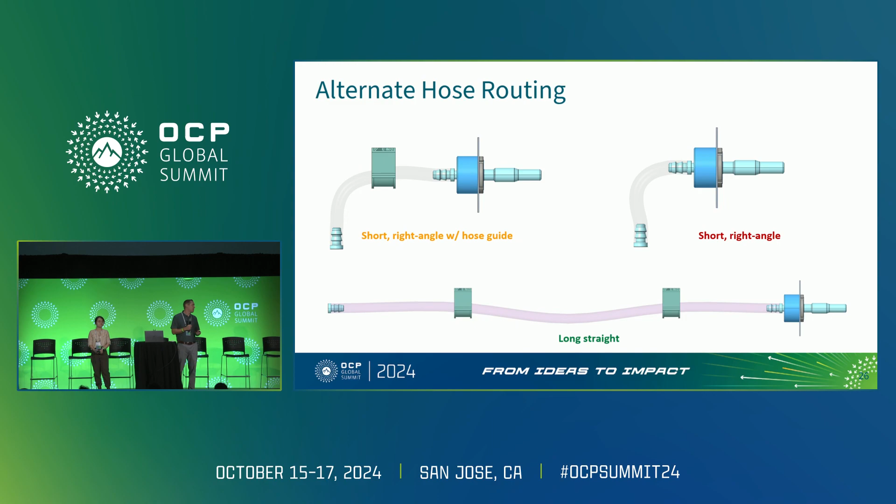And then in the top right picture, when you don't have that hose guide, you have that tight bend coming off the hose. It can put some additional forces directly onto that valve, and so that's when you get a little bit worse performance. So with all this in mind, we are still doing some further investigations on this, and we'll be providing some additional updates to the community later. But this is one of the work streams that we're pursuing currently.

The next area that we focused on is EPDM hose investigation. And really this was a piece of feedback that we received from the community, that there's a strong desire to use EPDM in some scenarios. And then there's also looking ahead at different future regulations on PFAS. I mentioned earlier, the initial specs that were released were done with PTFE convoluted tubing. So this is one of the work streams that we were also looking into.

Within the group, there's some hose manufacturers that we worked with to develop a thinner, more flexible EPDM hose with specific chemical compositions that work with the coolants with these types of systems. Another strong request from the community is that for the connection to the plugs themselves, there's a strong desire to have a push-on style connection to the barbs, which doesn't require a hose clamp, which, the clamps take up additional space and can create some sharp edges depending on the type of clamp used.

So with this, the new EPDM products that were developed through the different vendors within the group are currently undergoing additional validation testing. And this will be happening both at just the hose level and then at the combined hose and valve level. So some of those initial tests include burst tests, impulse, creep, HALT, and permeation.

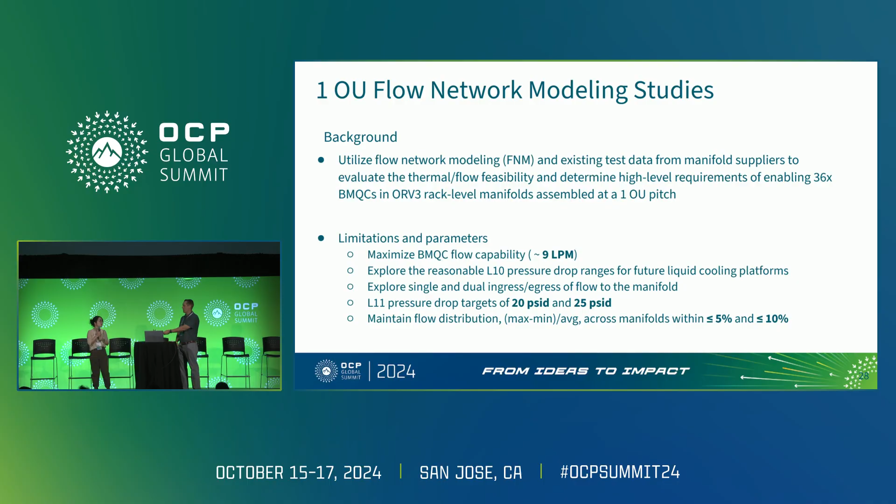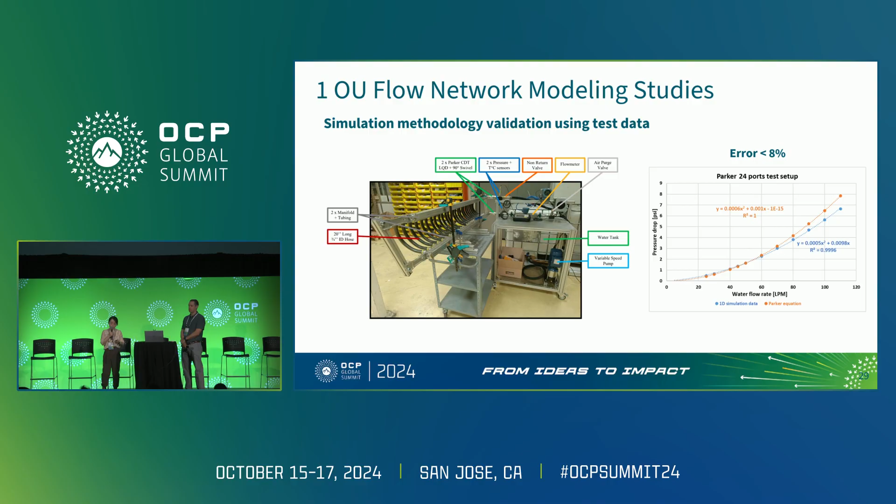So we started with validating our simulation methodology using the existing test data. Thanks to our manifold supplier, they helped us to do the manifold flow and pressure drop testing. So on the right-hand side, you can see there's a chart comparing the test data versus our simulation. Simulation is the blue line, and the error is within 8%. So after we validated this simulation methodology, we built our baseline model using 1D flow simulation.

And here are the baseline model settings. So we use a blind-mate manifold, of course, with 36 1OU design. For the manifold itself, the swivel tube has 25 millimeter internal diameter. And for the manifold itself, we have 40 times 40 millimeter square cross-sectional area. For the large QD, we were using 1-inch OCP large QD average performance, with certain extrapolation from 120 to 160 LPM. We were also using 5 millimeter BMQC average PQ performance.

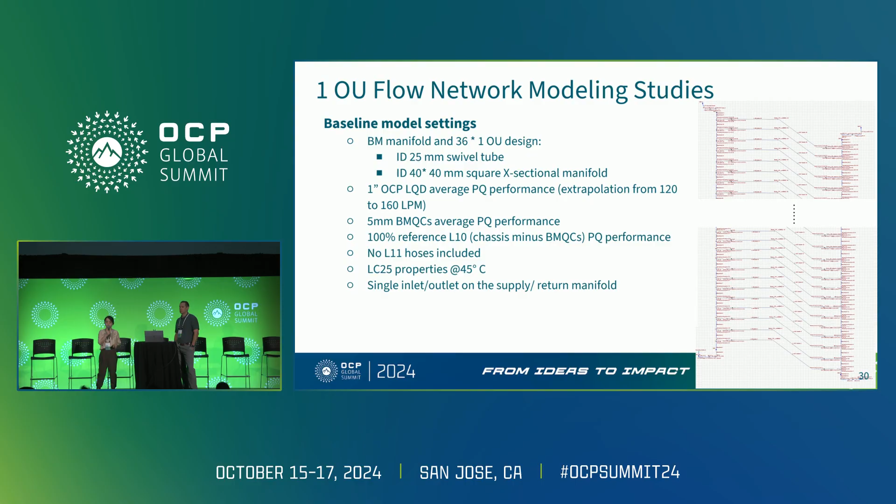And in the baseline, we use a certain reference L10 pressure drop design without any QD. There's no L11 hose included in this simulation, and we use Dowfrost LC25 property at 45 degrees C. There's only one inlet or outlet on the manifold for the baseline model. And then with the baseline model, we continue with the sensitivity study.

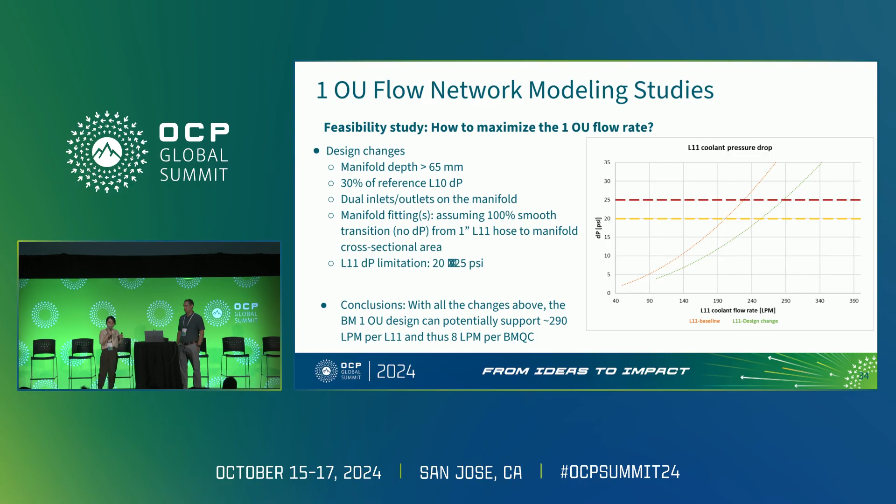There's one more thing we need to mention. We want to assume there's no frictional loss from the L11 hose to the manifold cross-sectional area, assuming there's a certain customized design which can reduce the frictional loss to the minimum value. The last is we want to increase the L11 dP limitation from 20 psi to 25 psi. So with the design changes above, we can guarantee the current blind mate 1OU manifold design can support up to 290 LPM for the L11, which means 8 LPM per blind mate QC.

I will give it back to Darryl. All right, thank you, Wenying.

So continuing the discussion for 1OU pitch investigations, there are some physical implementations that we also had to evaluate for feasibility. The first one was the manifold manufacturing based on a 1OU pitch. Within the group, we performed some manufacturing studies and created some different prototypes. The purpose was to verify that the tolerances specified in the blind mate manifold specification could be achieved with this tighter pitch of ports on the manifold. As you add more ports, due to the manufacturing processes, you're typically adding more heat into the tube, and you need to manage that. So we wanted to verify that was achievable.

The reference design with the 1OU pitch, as Wenying mentioned from her flow modeling, used 36 ports at a 1OU pitch. We did have a cross brace at OU position 23, roughly in the center of the manifold design, using the blind mate liquid cooling kit developed previously. Currently, first article inspections are ongoing for those prototype samples. Preliminary results from one of the suppliers suggest those tolerances are achievable, and we're still awaiting results from the second supplier. So far, the results look very promising, and this can be dialed in through manufacturing processes.

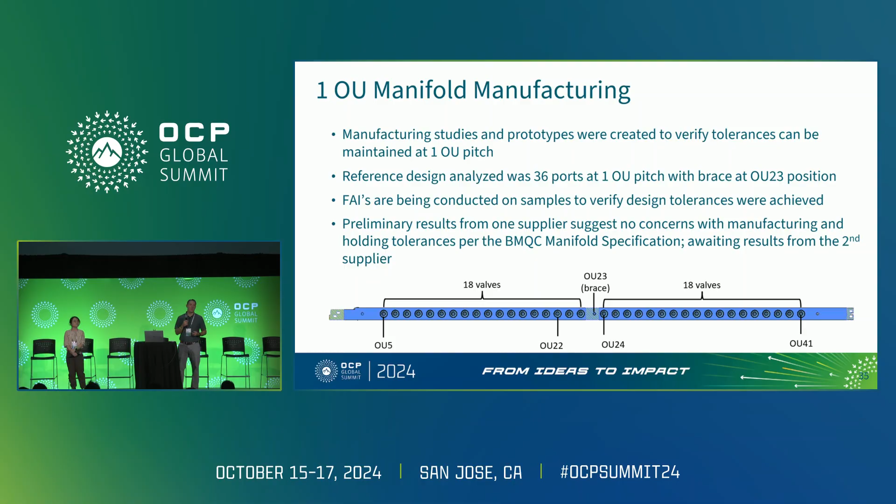Obviously, the next thing we had to look at was the chassis itself. The IT gear is going down to 1OU size. So we created this reference chassis design and performed some FEA analysis on it. The first thing we noticed is with the float of the plugs and the housings in the back, there's a centering feature with a retaining ring on it. Because of that float, there's a 43 millimeter keep-in zone we had to maintain. So we added a couple of slots in the chassis to allow the full float range of the centering feature. It doesn't extend beyond the chassis, but we needed that cutout to allow the full range of motion.

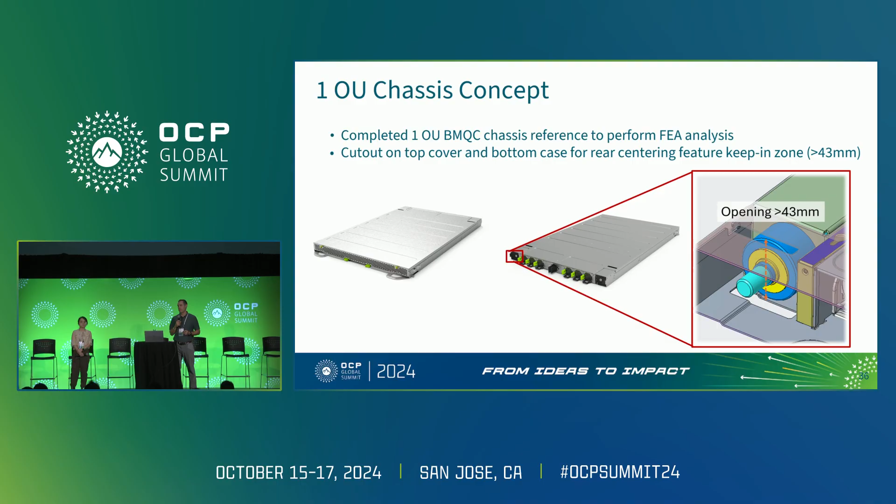The second thing we looked at was from an FEA analysis standpoint. We increased the pressures from 35 to 50 psi for the valves. So we wanted to look at the mounting features within the chassis, the bracket specifically, and the surrounding structure, to make sure with the added pressure and smaller form factor we were still within the displacement and stress limits of those components. The outcome of that analysis is that we verified that with the 1OU chassis design, we are still within the IT gear design limits.

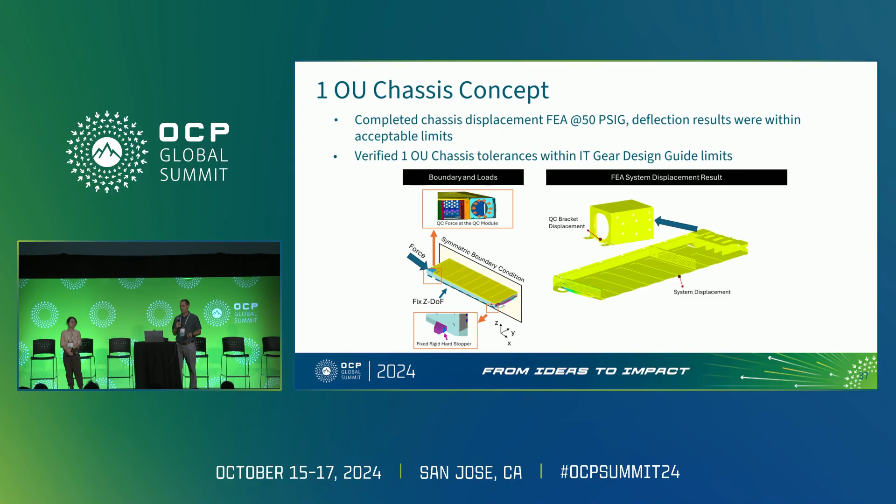Oops, skipped ahead. All right, the next area we looked at within the chassis is the hose clearances. With the float on the plugs, as they move around, the hose moves with them. So we wanted to make sure the 1OU chassis design wasn't going to limit or constrain the movement of the hose and impact the mate force of those valves. We used fixtures and PTFE convoluted tubing to evaluate hose movement within the 1OU chassis design. In addition, we looked at the worst case blind mate quick connect skew within the zones in the chassis, and we defined this minimum keep-out zone.

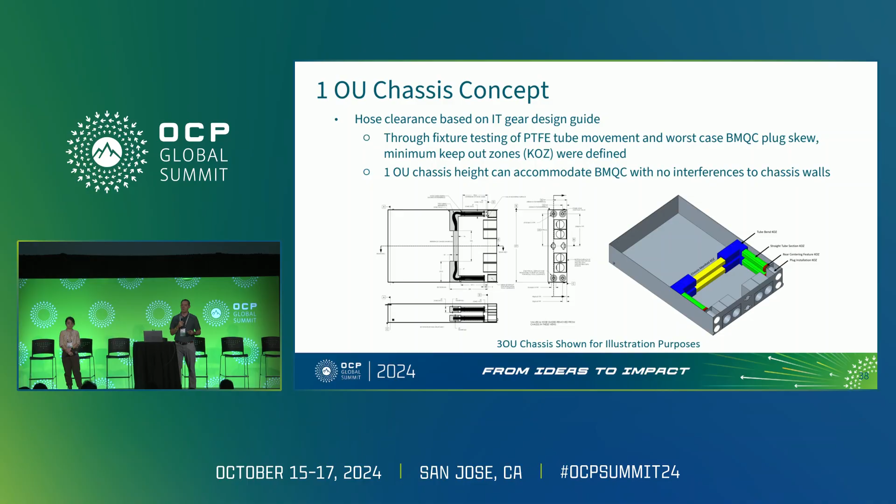And the result of this overall investigation is that the 1OU chassis height can be accommodated with BMQC with no interferences to the chassis walls. All right, and the last part of this analysis was looking at both the manifold individually and the system as a whole in terms of the strength and deflection that we see, given that we're going from 24 ports in the original reference design to 36 ports at 50 psi with the updated.

So starting off, when we look at the manifold only, we look at stresses and deflections, and overall that looked very good. Everything was well within the yield strength of the material itself for the tubes, so no concerns on the manifold side.

When we did the FEA at the system level, so that's adding the rack into the design and the mounting structures, we did find that there are some displacements at the manifold port. So one of the things that we looked at is the displacement at the tip of the port. And from that, we did see that some of those displacements did exceed the design slightly, as well as some specific discrete locations within the rack from a stress level exceeded the yield strength of some of those components.

So what that tells us is that there's a little bit of additional work that needs to be done on some of the rack side components in order to fully support a 1OU design. Some possible ways to address that are to add additional web stiffeners. We didn't increase that from the original reference design that was released this summer to the 1OU investigation. We still used 4 of those web stiffeners on each side. We could easily increase the number of those. That adds more stiffness to the front of the rack where the injectors from the IT gear are pushing on.

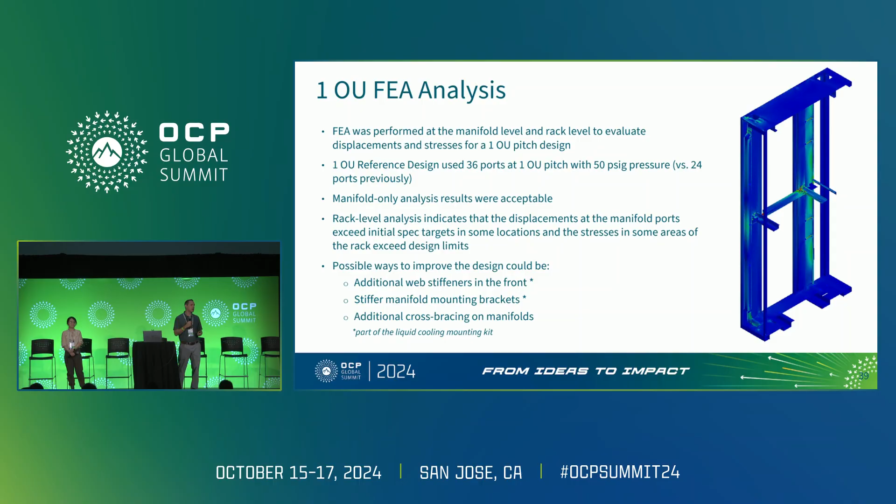And then finally, another option is to add additional bracing beyond what's already specified in the blind mate liquid cooling kit. So for that, maybe putting something behind the manifold to help counteract the force of all those valves. So those are some of the things that we looked at. We didn't go so far as to actually develop all of those different solutions. That's really going to be up to the community to do the final design on those and validate their own designs. All right, so that's what we have for the updates.